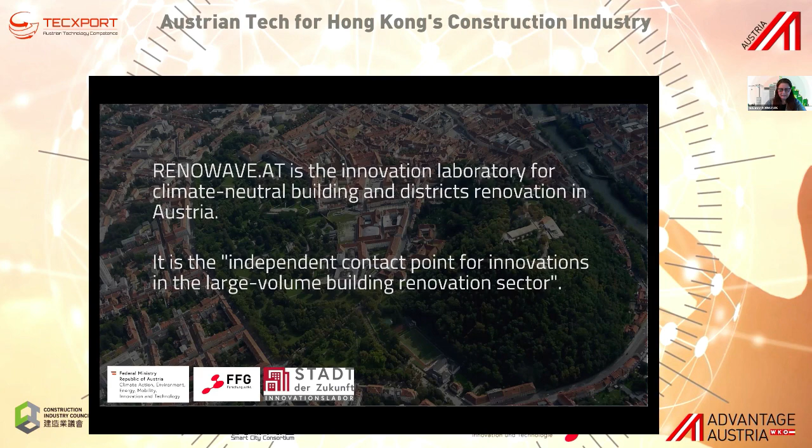The second one is green instead of gray, GRÜNSTATTGRAU. This innovation lab focuses on the topic of green building in the city, greening buildings, green roofs and green walls, which is also very important to bring nature-based solutions into the city, because in Austria we have a specific construction sector. As you can see here, our buildings are really old, from 400-year-old buildings to net zero energy buildings on the right side down.

This means we have a really broad, different kind of building sector. And on top, we have also a lot of social houses, which means 53% of our buildings are owned by social dwellings, for instance.

We have new challenges, and one of the challenges is, of course, the heat coming up in the town. Between now and 2050, we will be increased by 2 degrees, and then we need more energy for cooling down our buildings and our cities than to heat up our buildings. This is a fact, and it's also written down in the IPCC report, and we know that Austria is hit by climate change very hardly.

We know how to build, exactly, because, as you just heard, we have a lot of technologies, we have a lot of innovations, and we are very glad to have also a building assessment. It's called klimaaktiv, by the Ministry of Climate Change in Austria. This is a building standard rating.

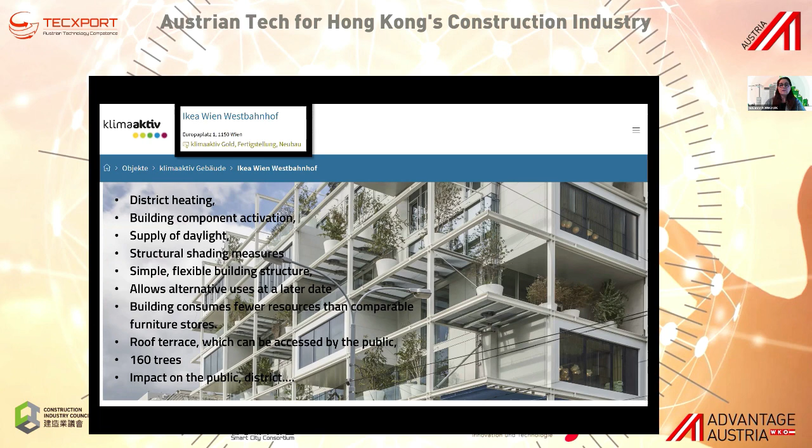You see here in the background one building. It's the IKEA in the station center in the middle of the town of Vienna. This is also rated by klimaaktiv, gold standard. As you can see, it's a kind of tricky building because it has not only district heating and building component activation and all this technique, but there are also 160 trees. This is important because in the planning period, they looked at the microclimate and asked, what can we do with this building?

Not only to have the highest standard of building techniques, but also to cool down the area, because this district is very hot. The Westbahnhof is one of the hottest spots in Austria. They built up this building, and with microclimate simulation they achieved cooling down the whole area by 1.5 degrees right now with these 160 trees.

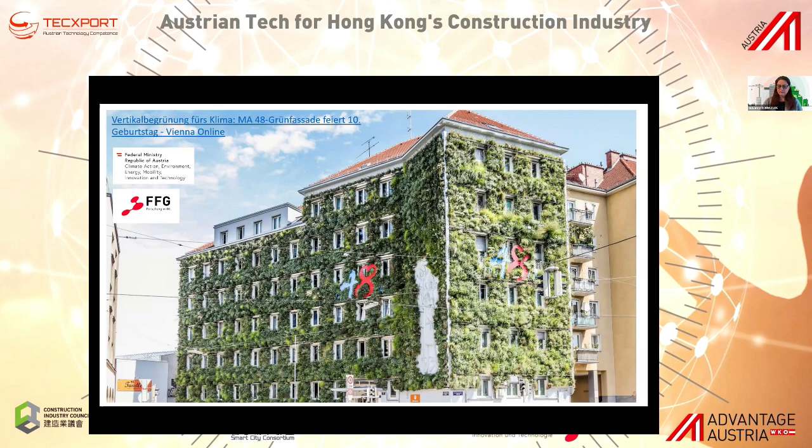The other example is a renovation called the MA48. It's owned by the city of Vienna, in the middle of town. It was greened on the whole facade, and it was built in 1915. What they did is they looked at the insulation and asked, what can we save in energy if we substitute the insulation by using plants on the building? And yes, it was working.

We have there 850 square meters of planted grass, with grasses and herbs, and we can save on air conditioning by cooling down not only the building with plants, but also the area around, and you also get noise protection. The microclimate here, the leaves increase the humidity and cool down the surroundings.

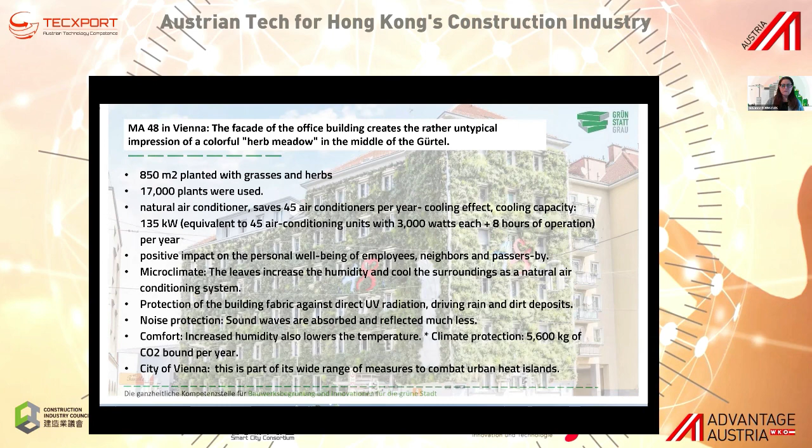Another example is the former Coca-Cola area. It was at the time when it was beginning, in 2018, when Harry Glück was still alive. This huge area was also planned using microclimate analyzers. As you can see on the left side, it was planned by Greenpass, based on ENVI-met software. Right now it has cooled down the surroundings by more than 2 degrees already.

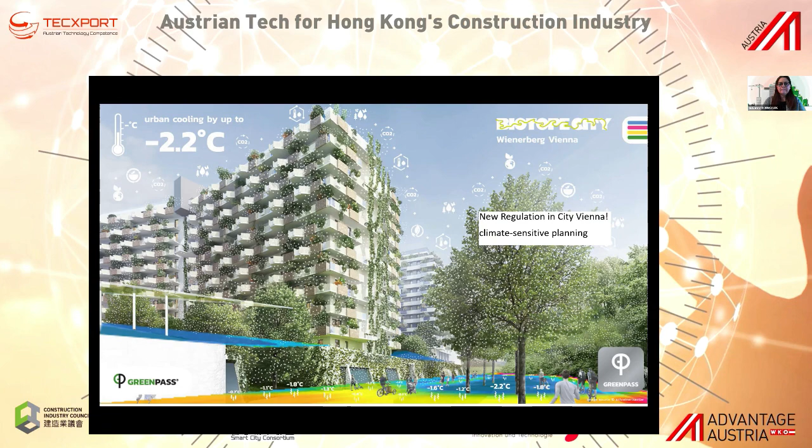Here you can see the central station. There are a lot of glass facades, but also in combination with trees. This is a building in the city of Vienna, where the city tries to substitute mechanical shading with plant shading, and it was working. It's now, I think, more than 5 years old, and we have cooling of the building through shading by the plants.

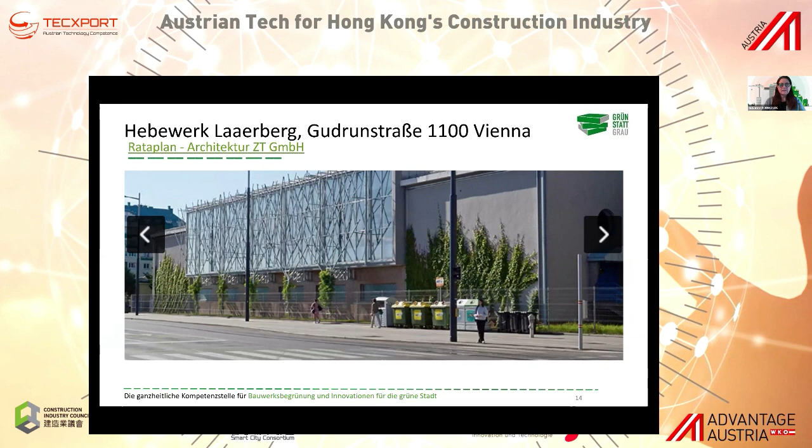We have a lot of glass facades in Vienna, and it's also a topic about the albedo, the reflection of the sun. To avoid heating up the cities, we can also combine it with shading systems using architectural elements, like you can see here, in Laaerberg. So it's very important to combine the techniques we have in the building, for instance using gray water, insulation, or preconditions for ventilation systems, with nature-based solutions, as you can see here.

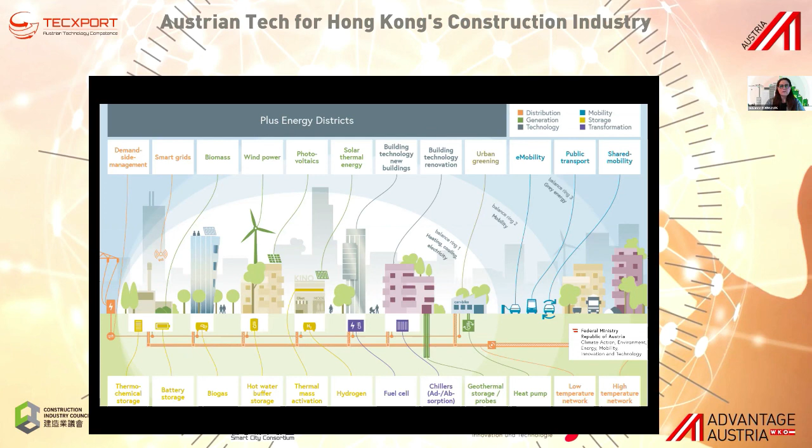But also, as we heard before, to combine it with or find synergies with a plus energy district. This is a presentation slide from the ministry, and you can see it with these bubbles. Of course it's not only electricity we are looking for and focusing on, but heating and cooling. It's also mobility that should be concerned, and gray energy in combination. So we do not have to focus on one building, we have to focus on districts. This is very important to find the best combination for a future plus energy district, and not forget that we have climate change, but we also have to mitigate.

This is a slide from a partner from Greece, which I think is very interesting, because they made up some thoughts about where innovation is headed in the future. As you can see, there are for instance cool pavements, and new innovations right now like smart clothing. We are speaking about buildings that are already built. So what can we do with these buildings, for instance with new innovations in nanomaterials, use of the ground, use of the ventilation which is already here?

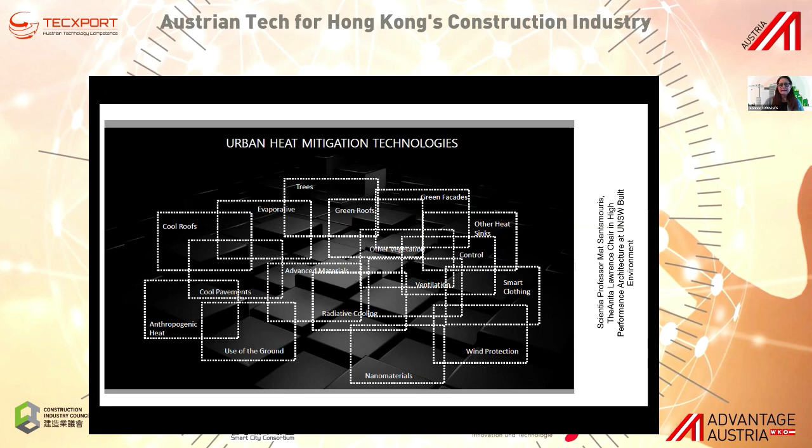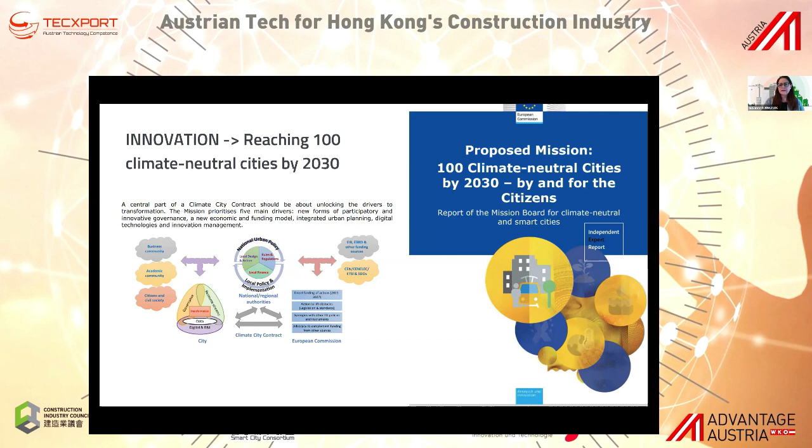In the last 5 years we had about 250 projects in this area, and there are still 35 running, and they're all on our website. This is very new, that we are focusing not only on districts but more on cities, because of the new mission of the European Commission, called 100 Climate Neutral Cities by 2030. There it is very important to focus on the people living in the cities, the municipalities, and we are working together with them.

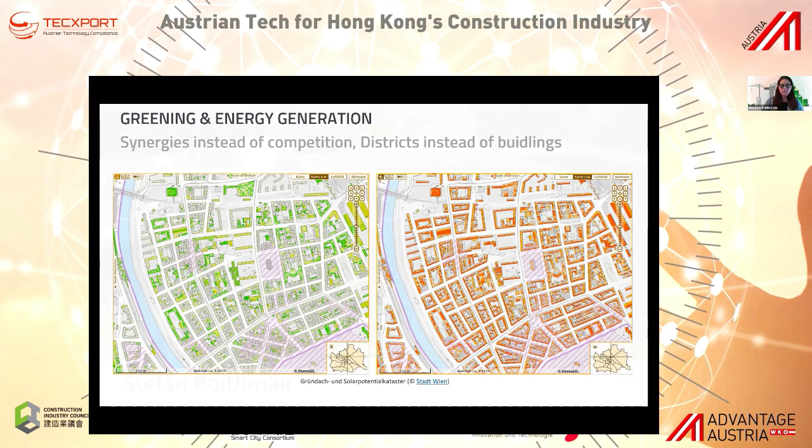You can see the cadastre of the city of Vienna, which shows how we can use our roofs for production of energy through photovoltaic, but also at the same time use it for greening the city. This must not be a competition, it could work together, and here you can see one innovation - you can also do it with bifacial systems, which are quite new. This combination is 10 years old, and it's working, with a lot of advantages.

In the future, we have to measure and plan with all the data we can get. Here you see a visualization from ESA, from the Sentinel satellite data.

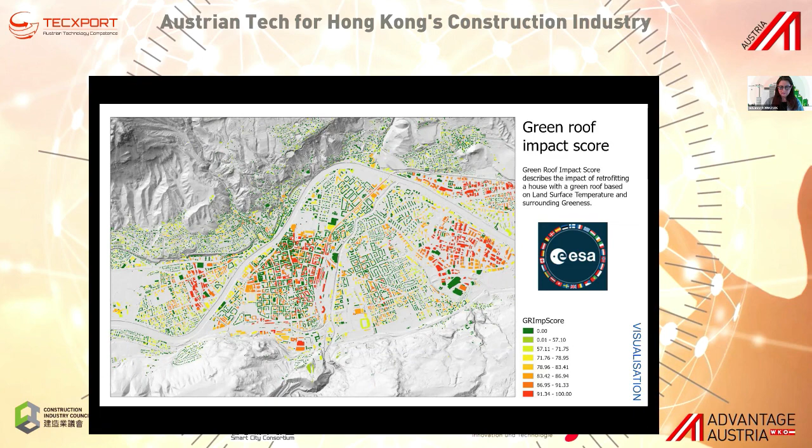What we are doing right now is using this data, and here you can see the score describes the impact of retrofitting a house with a green roof based on the land surface temperature and surrounding greenness. This is Innsbruck, in Tyrol, Austria, but you could also use it for the electric power production potential, how much we can get from power production potential, which is quite interesting. I think there are a lot of possibilities for us using this data in the future.

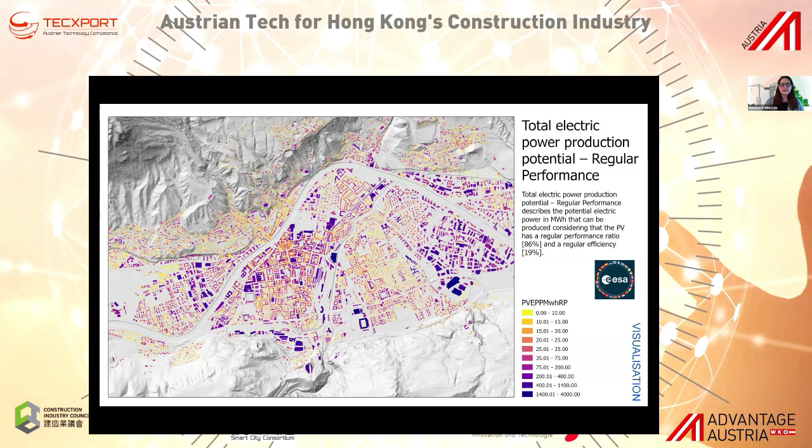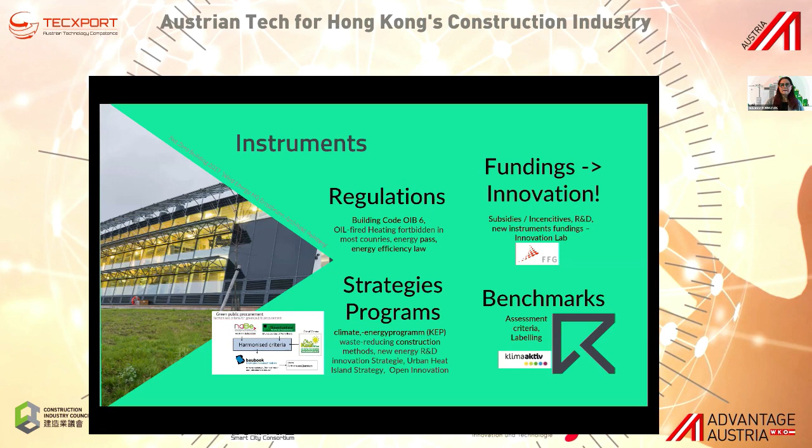So to come to an end, I will sum up what we are doing right now in Austria. We have our instrument: the regulations, the building code, based on the Energy Performance of Buildings Directive. Then we have the Energy Pass, the Energy Efficiency Law. We have funding - there are a lot of possibilities in Austria for subsidies and incentives, but also for R&D and new instruments. Then we have strategies and programs, as you heard before, Klimaaktiv, but also our climate energy program, waste reduction, for instance, and what is very important is to produce benchmarks, as you can see today, with assessment and criteria, which also has labeling here. These are the four points we rely on.

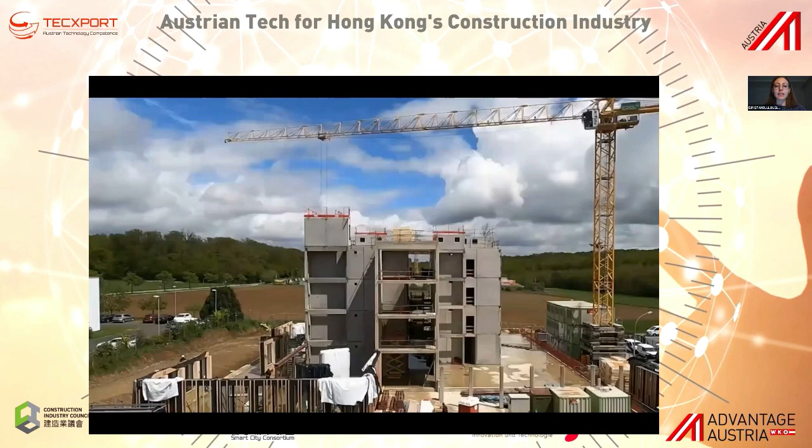Next slide. So what do CREE Buildings look like? What you see here is a flat pack modular systemized construction system based on concrete, timber, composite components, and timber frame wall elements, which are delivered to the site fully prefabricated, helping us achieve extreme assembly speeds on site. So we can cover 400 to 500 square meters per day, creating fully weather-tight spaces below.

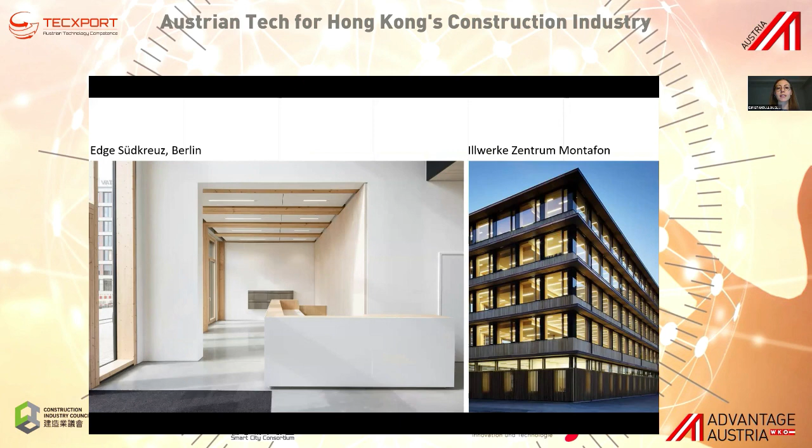This is an office project in Luxembourg, but we have projects there and also worldwide. So I would like to quickly click through some examples. Edge Südkreuz Berlin - this is currently the biggest timber hybrid project in all of Germany. Illwerke Zentrum Montafon, an office building in Austria. Next is the UBC Gateway Project, a university building in Vancouver coming up next year.

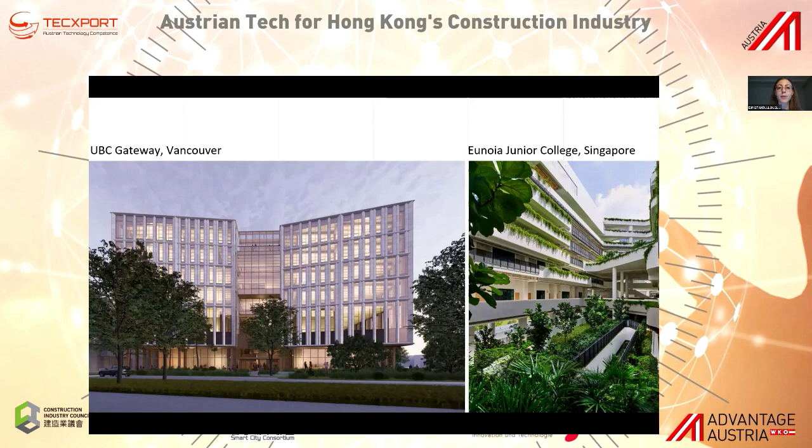Eunoia Junior College, this is an office building in Singapore in operations since 3 years. Next is Victoria Park Project, a residential tower in Toronto currently in design. And then Siemens Campus Erlangen, also office buildings, one of our biggest projects with 80,000 square meters footprint.

So how do we realize these projects? We are an international construction collective. That means we enable local partners worldwide to execute building projects with the same system and processes, utilizing local value chains with globally shared know-how. And that know-how accumulates on our digital platform.

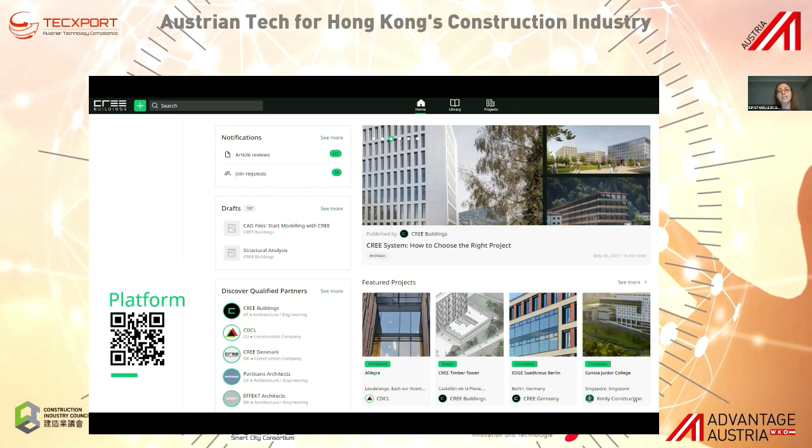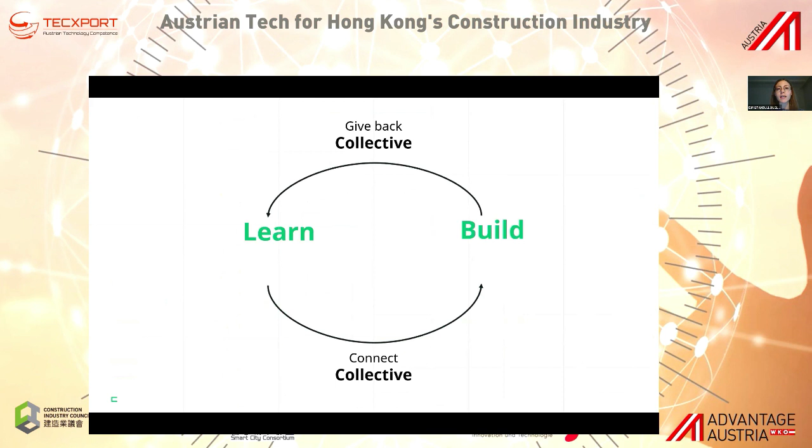This is how our digital platform looks like. It's an open platform that not only consists of a library, but also hosts the entire collective. We learn from each other, we build, and we learn from those buildings, so that learning feeds back to the collective again to build better the next time. It's all to build better and shape the future together. I would like to invite you to join the journey. Thank you, this is it from my end.

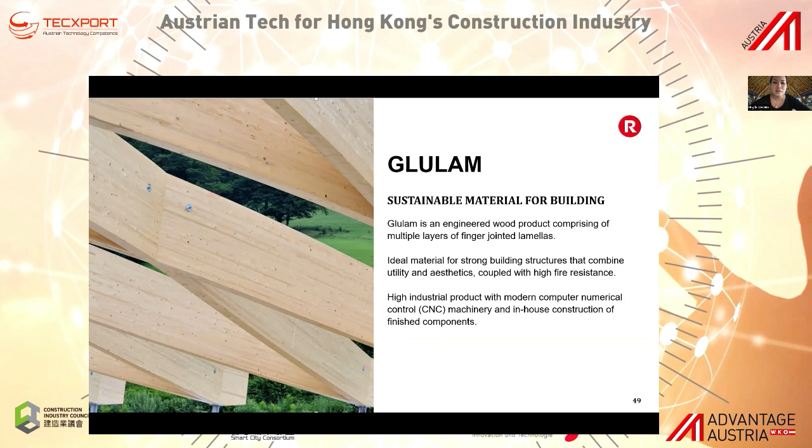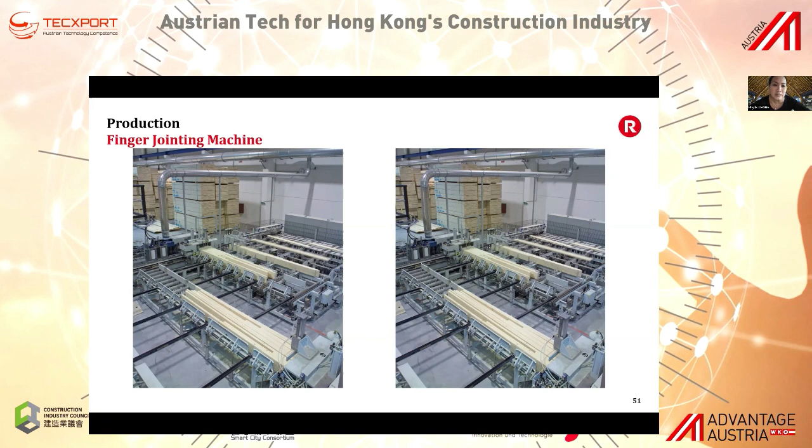I just want to show you some important steps to manufacture glulam. This is the finger jointing machine that can make glulams up to 50 meters long.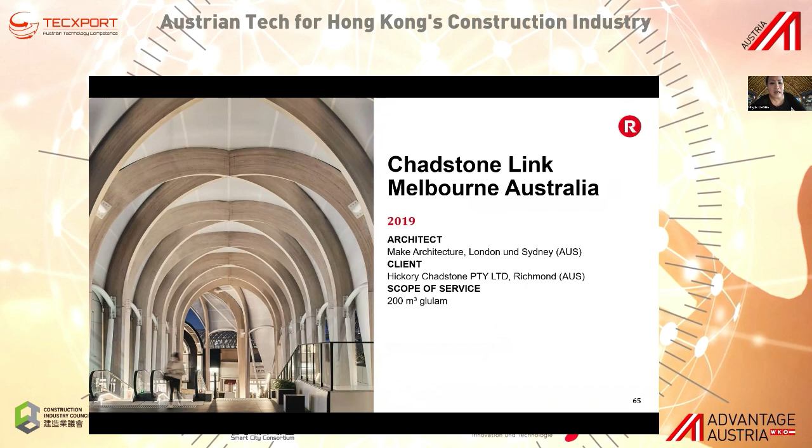Next, you can click on the projects.

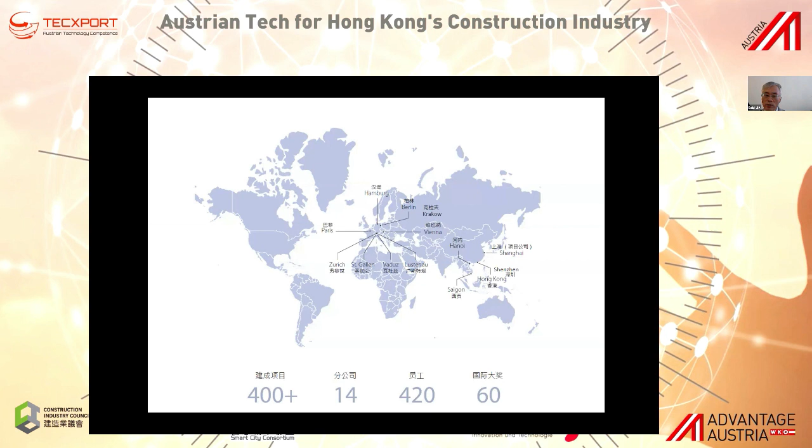We have a total of 14 companies, and 3 in Asia: one in Hong Kong and the second in Shanghai. We have done more than 400 projects since the company started in 1980, with projects across Europe, in Beijing, Shanghai, etc.

You may remember this building from TV - it's for the World Health Organization, built about 20 years ago in Geneva. So what is special about BE?

We're firmly rooted in practice, doing design work. We've demonstrated particular skill in combining flexibility, sustainable building, and a high level of craftsmanship with beauty of architecture, at reasonable price in simple, compact buildings. Our experience and know-how are significant for researchers and practitioners with respect to implementing sustainable building approaches.

This aims to achieve a successful combination of research and practice. So what does high comfort and low energy buildings mean? We need two things about intelligence: first, intelligence relates to knowledge, second, intelligence relates to technology. We always put knowledge in front of technology - know-how, how to use technology, is more important than the technology itself.

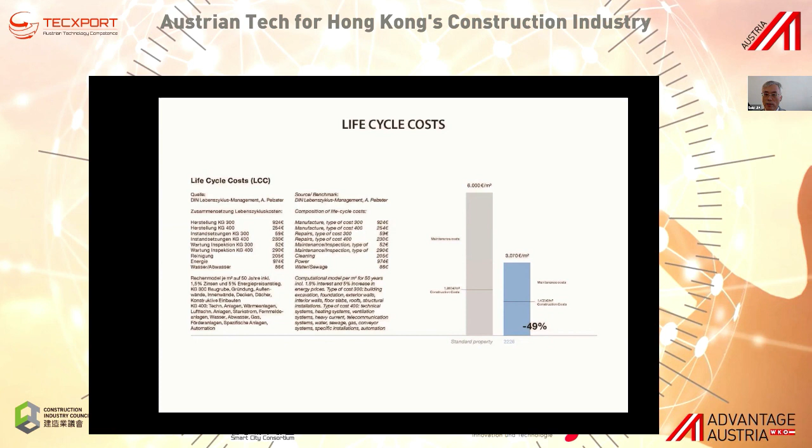For the life cycle costs of the whole building, we are targeting about 49% lower energy than conventional buildings, and construction costs even lower than conventional buildings.

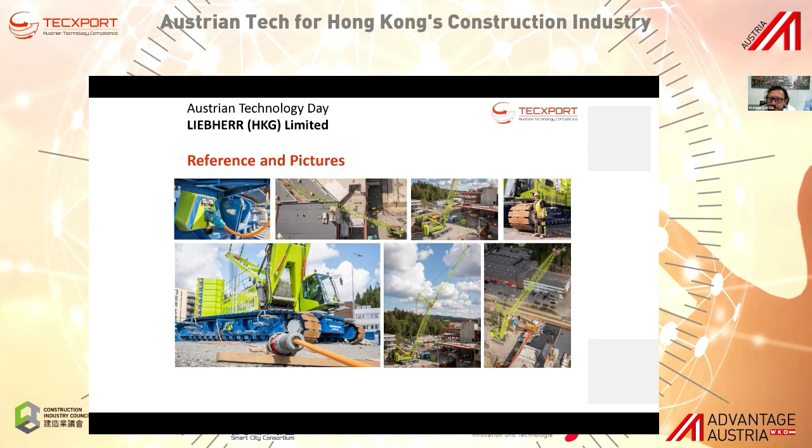We can already see that some major industry players are keen to participate in such changes. However, more work needs to be done, especially at governmental level in Hong Kong, to accept such emission-free machinery. Due to the higher initial investment costs involved, there are still obstacles locally which no longer exist in some European countries, which provide extensive funding for such environmental projects to speed up the market share of electrified construction equipment.

I'm looking forward to fruitful discussions in the near future. If there is any interest from anybody for a site visit or face-to-face discussion, this can be arranged at any time. Thank you very much for your attention.

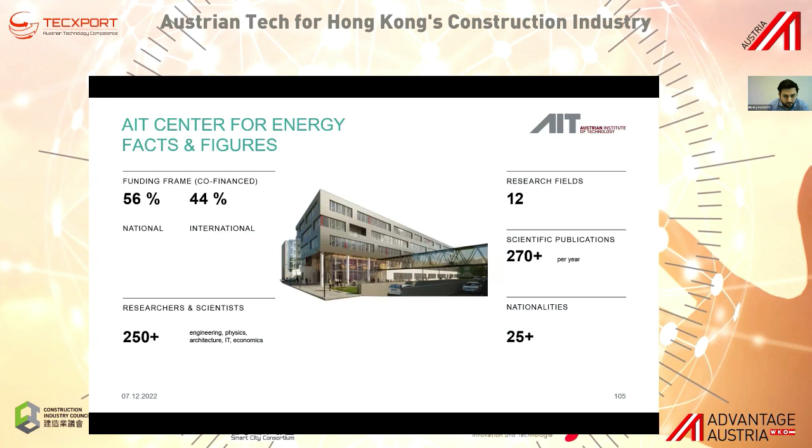Let me begin on the next slide. You can see the center is funded by national and international funding. We have over 250 researchers with a diverse background in different scientific fields, ranging from engineering to economics.

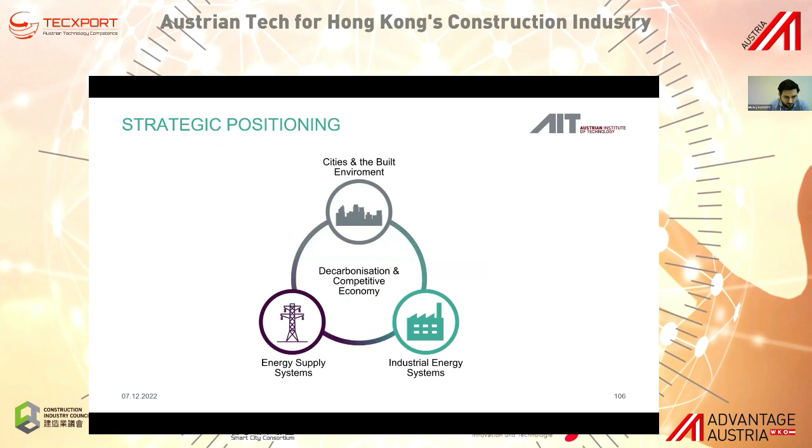In the next slide, you can see our strategic positions in energy supply systems, industrial energy systems, and - most relevant for today's talk - cities and the built environment. Regarding cities, the main innovation needs are digital building technologies, cooling and comfort for buildings, refurbishment technologies, and business models.

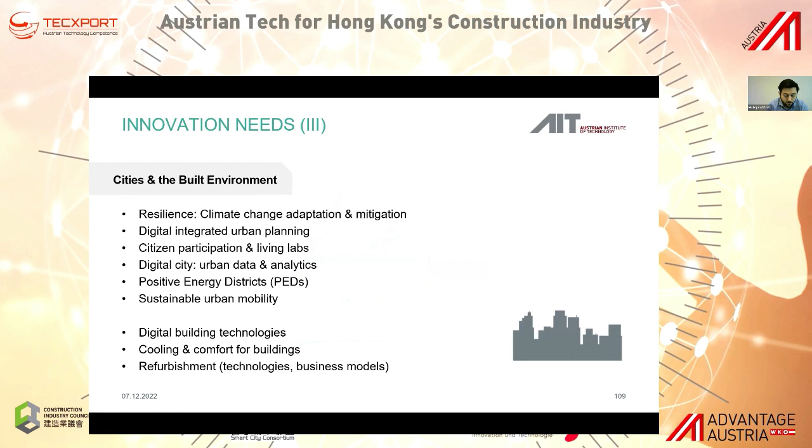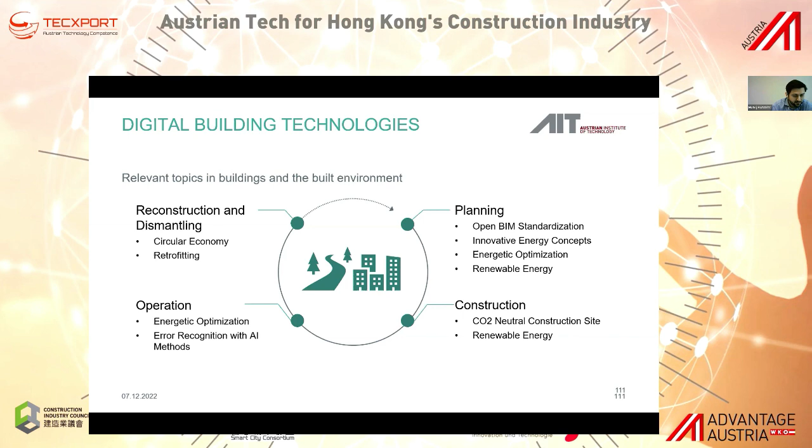And at the end of the presentation, I want to show you also the CIL, this City Intelligence Lab, which was developed as a platform for digital collaboration. We focus on urban planning, but we are extending it to the level of buildings.

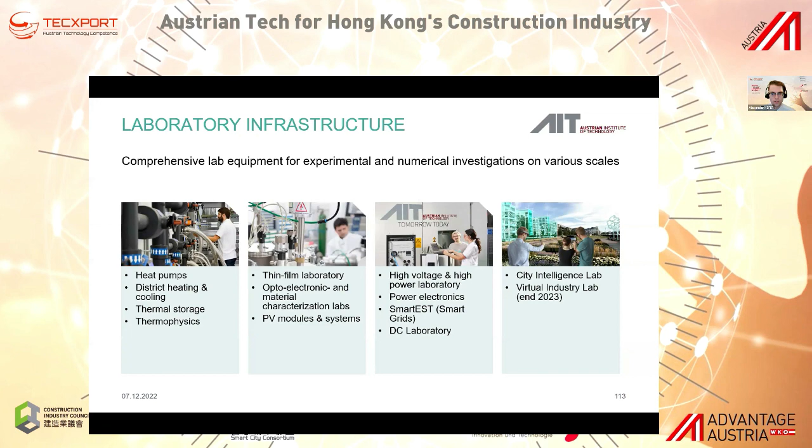Hi, everybody. Thank you, Alexander. Actually, we are representing SILBER in Hong Kong, Macau. However, the company I'm working for is AUB Limited. Let me introduce premium windows and doors.

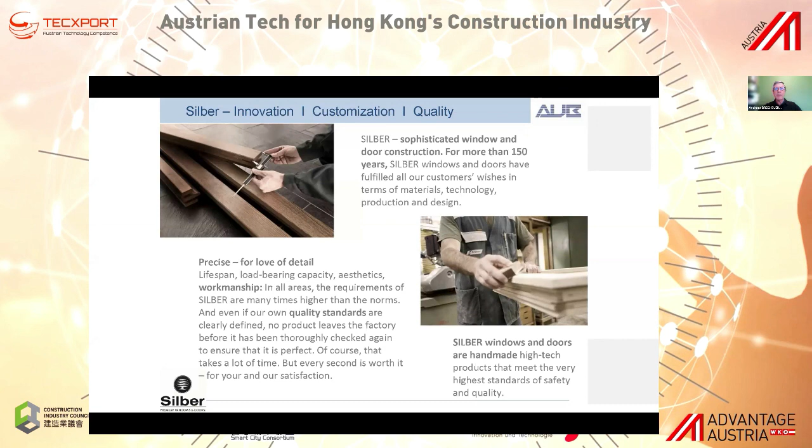SILBER main entrance doors have distinct features and benefits. The design leads to very good thermal insulation. The product can achieve best U values. The closed butt joint, as they say in the high tech of this particular industry, leads to the best sustainable wood protection, all innovated and further developed by SILBER over many years.

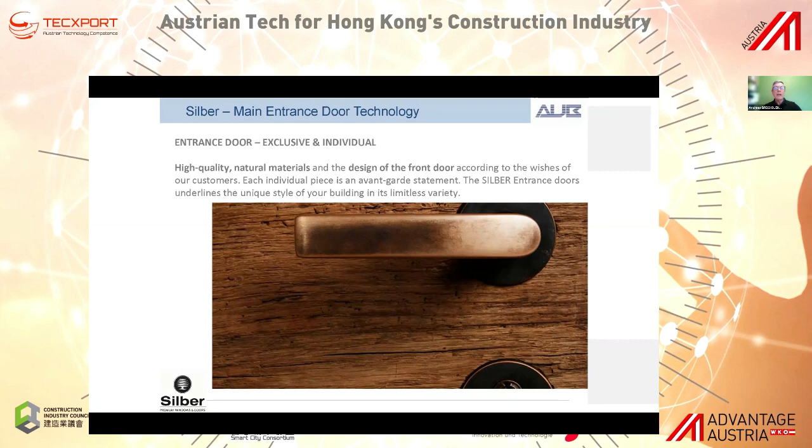A SILBER entrance door is unique. It is exclusive and very individual. Basically, what SILBER loves to do is to build a door which is designed by the individual, by the owner, or by his architect and interior designer, and they will make the door just for that.

SILBER is a family-owned business. They focus on individual solutions in wood, but also in combination with aluminium and bronze. Variable type of openings, forms, shapes to the highest quality standards, also in the hardware and fittings they're using. Attack resistance RC3, acoustic tightness up to 43 dB, thermal insulation, and of course a long-term warranty is part of the SILBER offering.

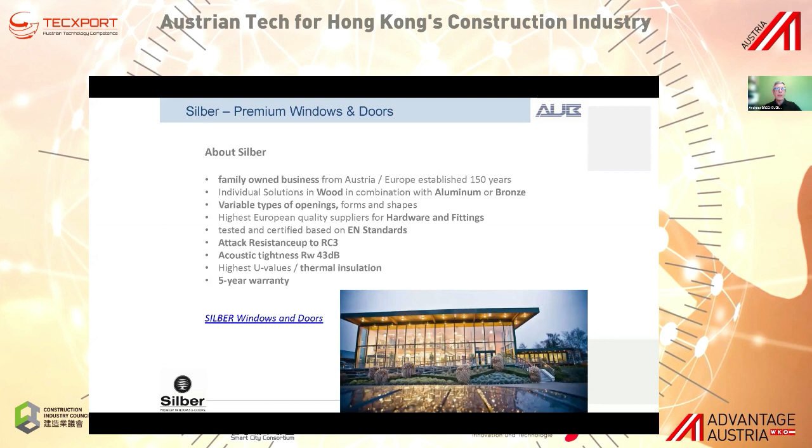A few pictures, luxury villas, French style, French windows. Also the doors related to the same house.

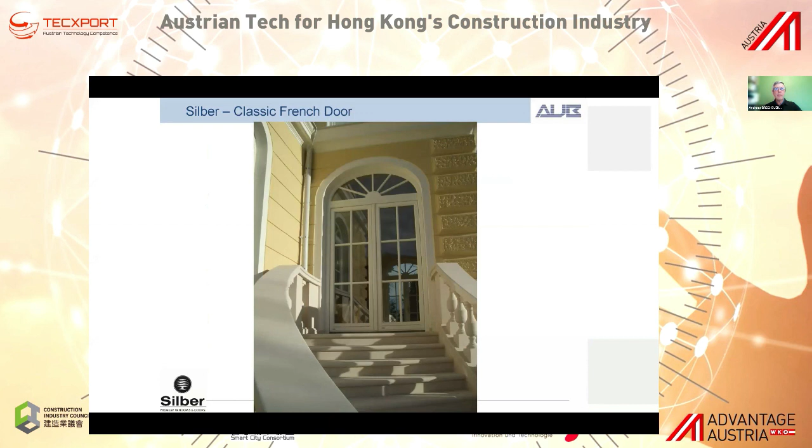Maybe a word about the technology, the hardware. The doors usually have a thickness between 82 and 102 mm, combinable with high security multi-point locks, security cylinders, and last but not least, of course most important for today, biometric entrance solutions from eKey, also an Austrian company.

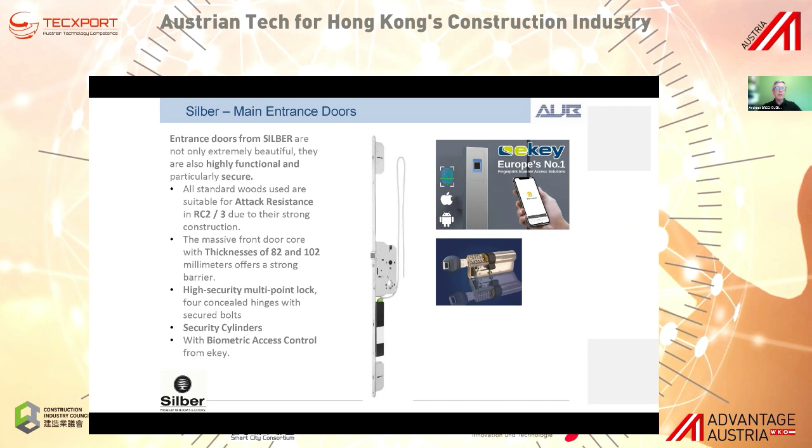And that's how it can look like. You can see here on the pull hand on the left-hand side is an eKey fingerprint module to open a classic door combined with very high-end technology.

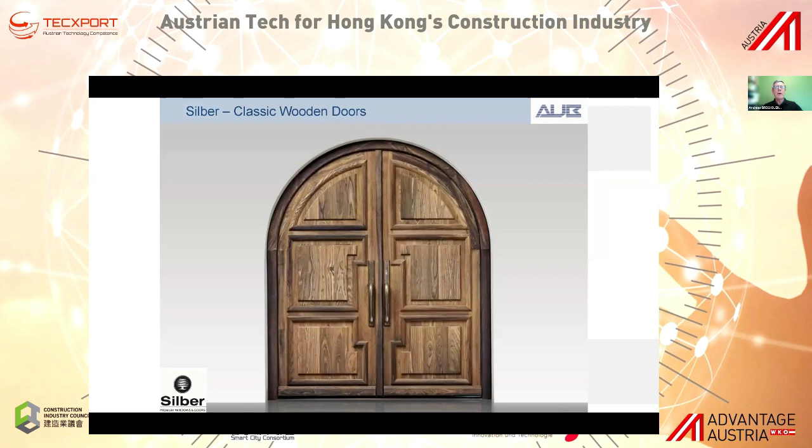These are how the doors look like, classic wooden doors. Very unique shape, bronze combined, and with bronze windows, architectural bronze, very specialized.

This is the door we showed at the recent Build4Asia exhibition in Hong Kong. We showed it as a live demo. It's an oak wood, and it made a big impression on the customers shown on our booth, AUB Limited. We are a sales partner for SILBER in Hong Kong and Macau.

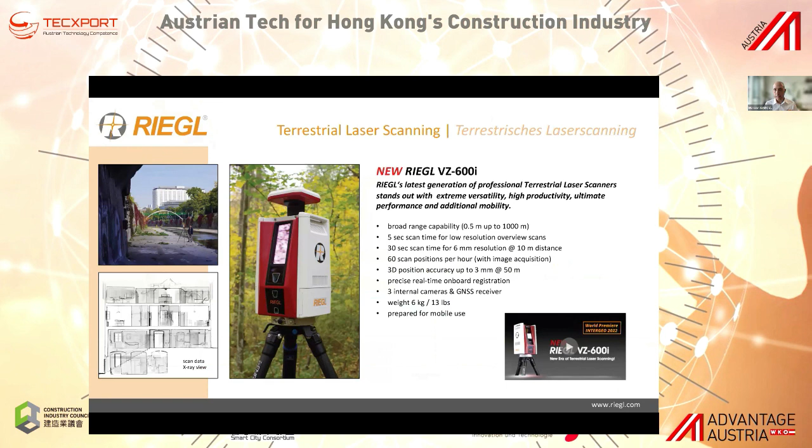I wanted today, next slide please, to quickly run you through what RIEGL does. Our presence worldwide you can see later. We do LiDAR and LiDAR 3D measurement technology. Almost any aspect of construction you can think of will need measurements, and that is what we do. Through a range of instruments, we measure the world. Anything from planning, design, construction, and even monitoring of almost every aspect of construction is what you will be using a laser scanner for.

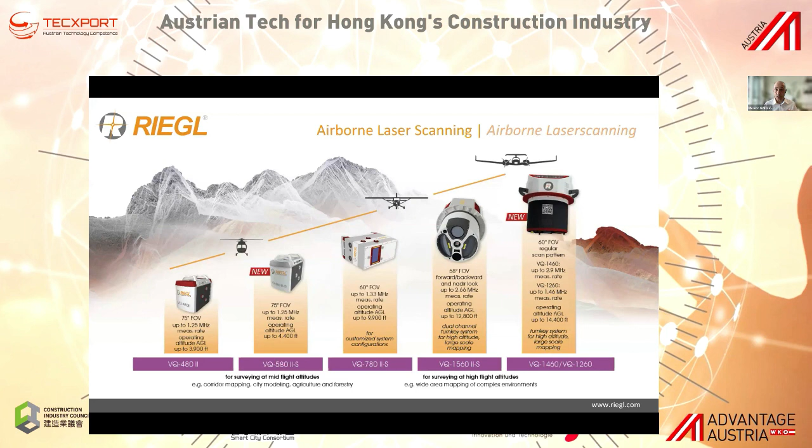Whether you want to scan a room, a building, BIM modeling, to scanning an entire city or an entire country, you will be scanning an entire city to plan how and when and where you're gonna put your buildings, your bridges, etc.

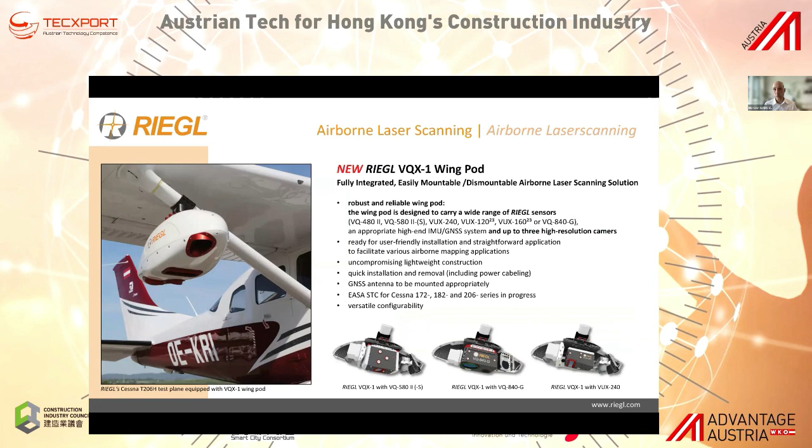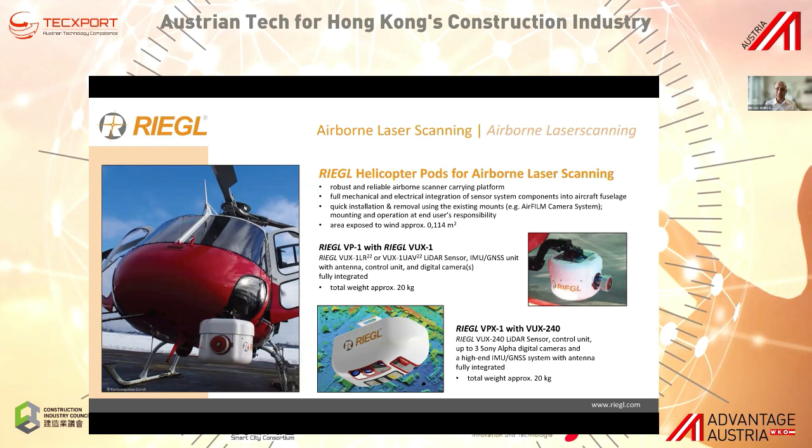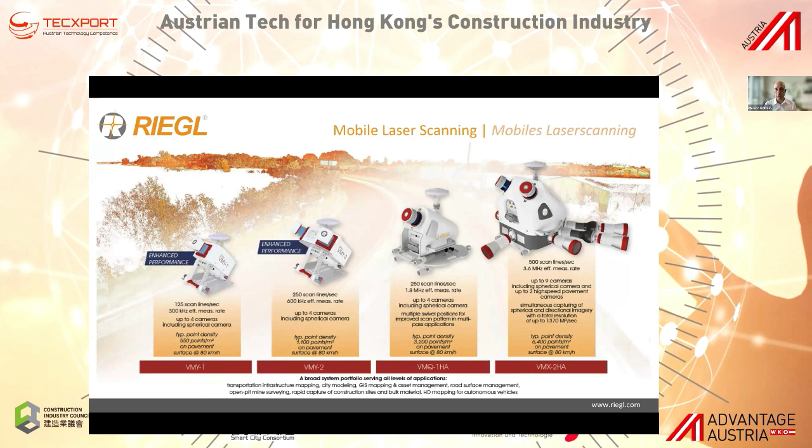So LiDAR technology nowadays achieves something that was unprecedented just a few years ago. RIEGL is at the forefront of the technology. We've been around for almost 45 years, and thanks to our researchers and developers, we have some of the most advanced technologies out there in the market. So please reach out either virtually or at the exhibition next week, and I'll be very happy to take you through your particular need and how a RIEGL laser scanner can help you. Thank you very much.

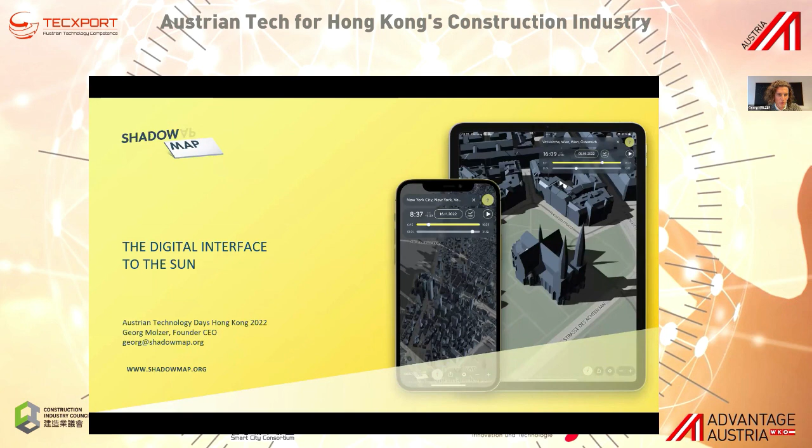Good evening, ladies and gentlemen. I'm Georg Molzer from Shadowmap. We are building the digital interface to the sun. Next slide please, we try to build the compass to the sun. So as the compass shows you north, we are guiding you towards the sun.

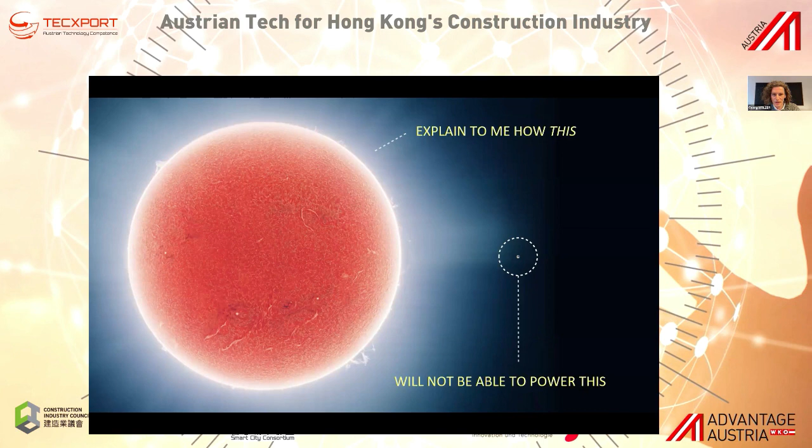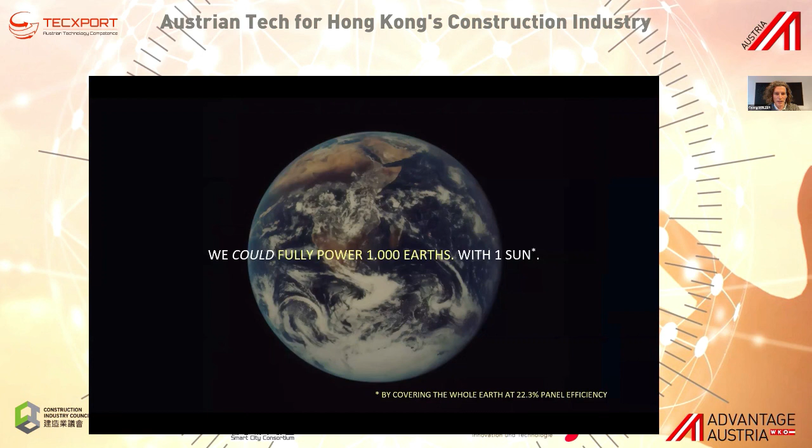The sun is super important. Its energy is what brings us into this life and keeps us alive and happy. It's crucial for liquid water, photosynthesis, and more. There wouldn't be anything here on Earth without the sun. Also, the energy crisis is a huge topic, and it's ridiculous given how we have this fusion reactor in the sky, which should be able to power our Earth. In fact, we could power 1,000 Earths with the energy that hits the Earth's surface. Yet we don't even source 1% of our primary energy demands from the sun. We want to change that. We believe in a world that runs on the sun.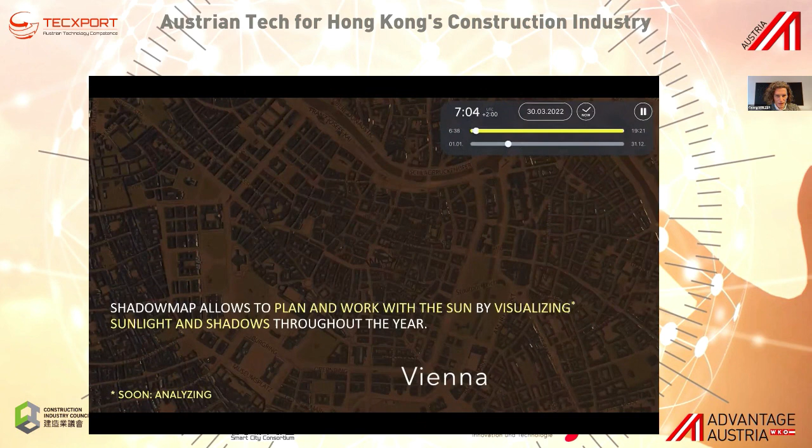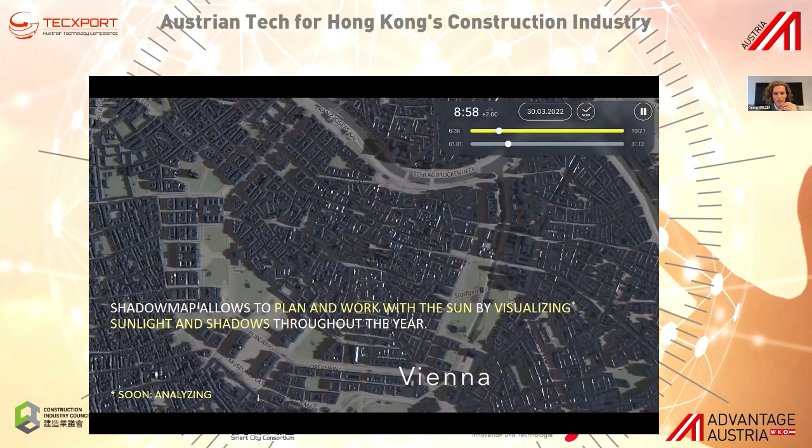And this is our contribution. This is Hong Kong, and let's stick with Vienna. We are building an interactive visualization tool that allows us to integrate different data, three-dimensional data, buildings, terrain, and also vegetation into an interactive app. And with this, you can visualize solar shadows.

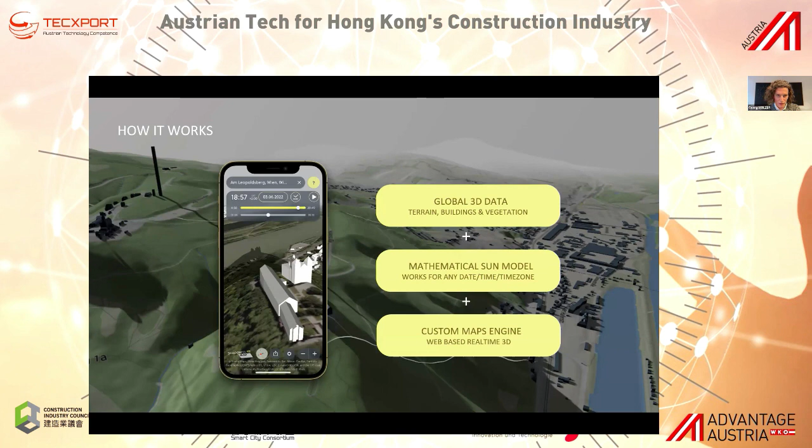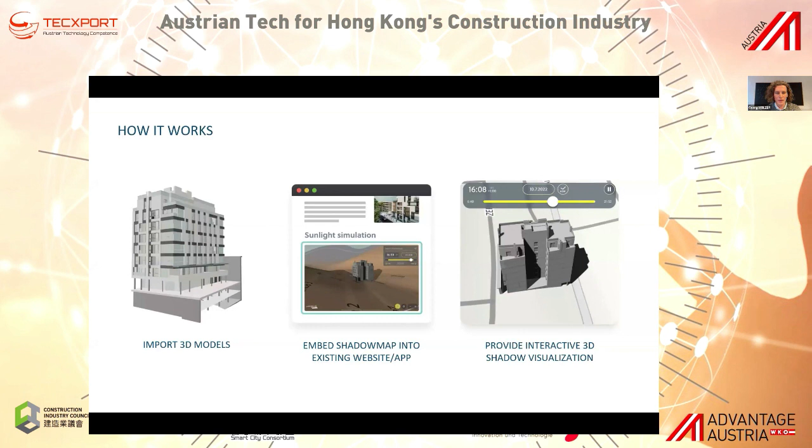This combination works on any device, on any hardware, and it runs right away without any download. We have a mathematical sun model and our custom maps engine, which allows us to integrate arbitrary data. You can also import your own 3D models. So what we are now working on is that on a district scale, you can import whole cities into Shadowmap. This works from 5,000 euros a month. We can do district scale visualizations, and you can use this for city planning, urban planning, real estate, and solar.

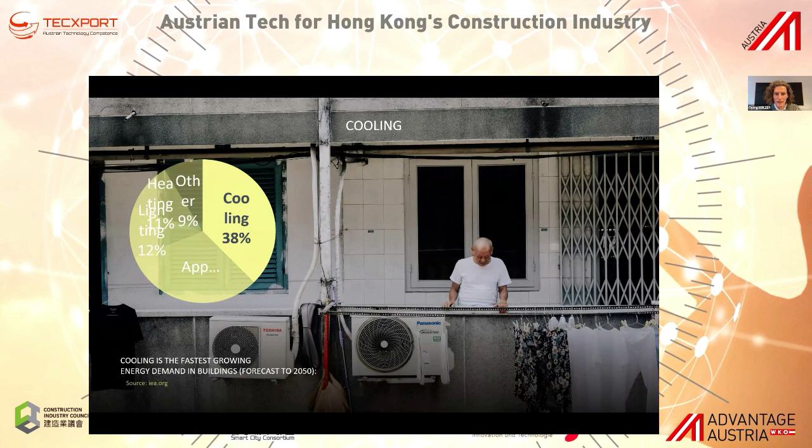This is our team. And our mission is to build the tools and inspire humanity to return into a synergetic relationship with the sun.

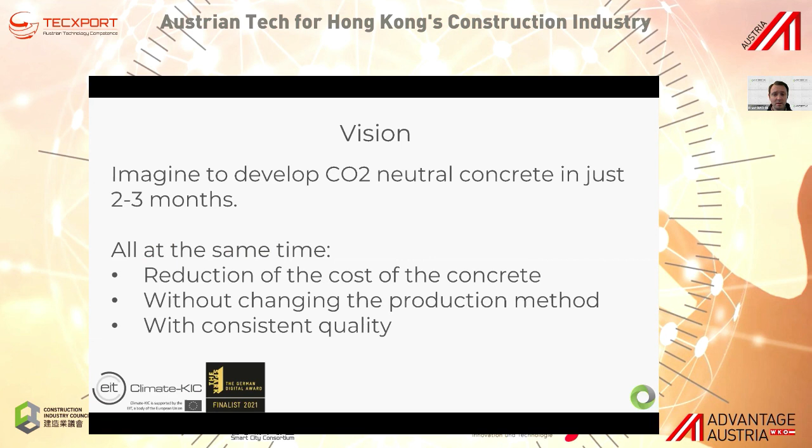Just imagine developing a CO2 neutral concrete within 3 months, with the same quality as always, without changing the production quality and without changing the production method. This will show in the next slide.

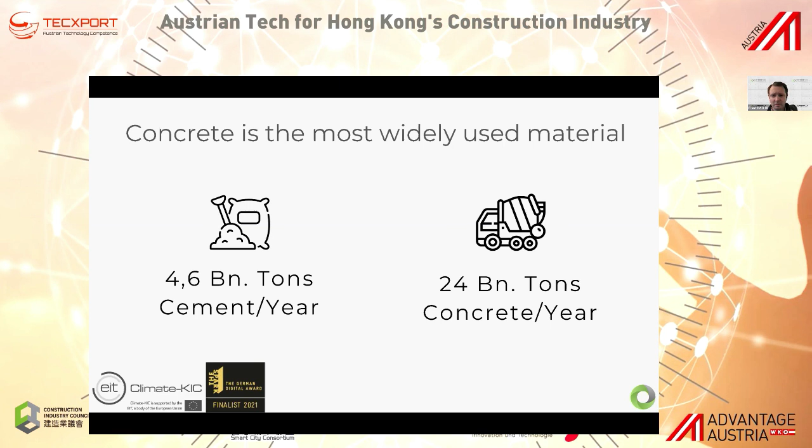On the next slide, I show you the problem. Concrete is the most widely used material in the world, with millions and billions of tons. And it's a big problem because concrete alone accounts for 8% of global CO2 emissions. So how do we tackle this?

As I said before, we developed the software as a digital mixing master where you can virtually simulate new, more efficient concrete mixes to reduce CO2 footprint, 10 times faster than doing it manually.

Why is this important? New and more efficient mixes are now done by hand through trial and error. With our software, you're not just faster, you also save money because you reduce cement, the most expensive part. And for the environment, it's positive because you reduce CO2, which comes from the cement part. It's a win-win-win for society, for your company, and for the customer.

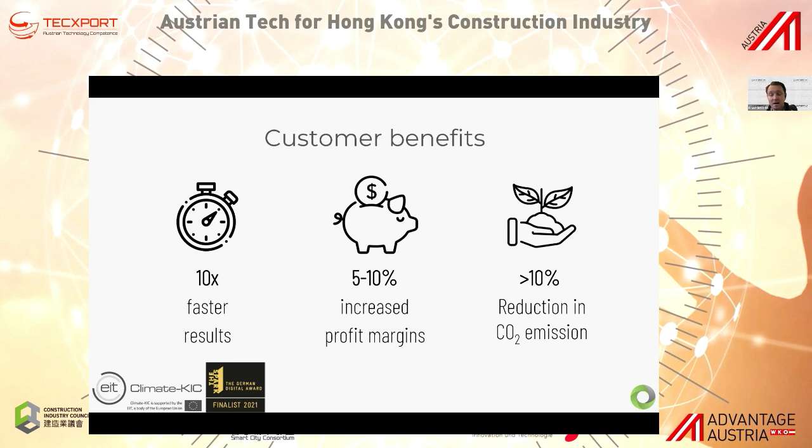This is a running project with some customers. We had the pleasure of reducing 5 to 10% with existing mixes.

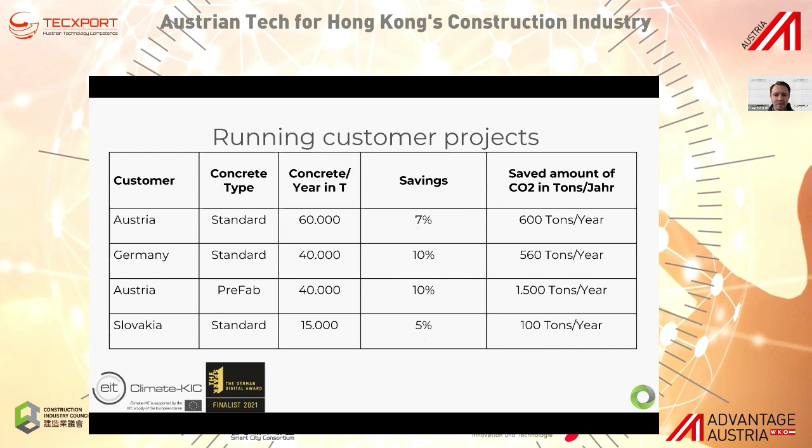And also in other regions, if you want to put in recycled aggregates, new materials, etc., especially for an island or a region where you import most of the materials, it's important to optimize the whole mix in terms of quality, price, and CO2.

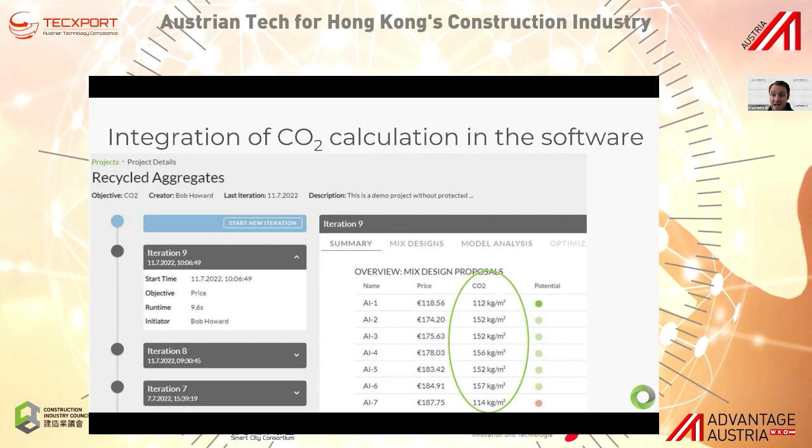We have some big corporations already using our software, from Austria to Switzerland to Japan, France, Europe. We're also talking with some in the US and New Zealand, and we're happy to go into China and Hong Kong.

That's our promise, that's our solution. With us, you will be 10 times faster to reach your CO2 goals and to develop new, more efficient materials within 3 months. We're happy to support you on the road to net zero.